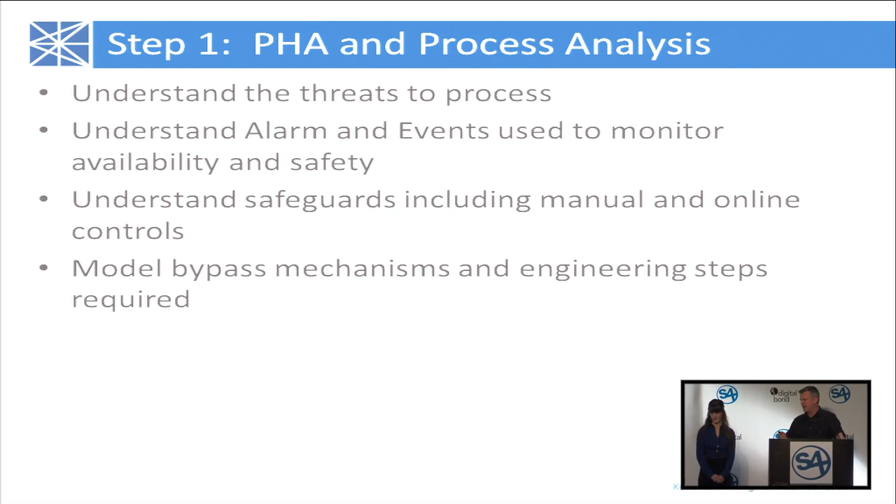So with that, we're going to talk about a distillation column, and it all begins with a P&ID. I got asked several times, are you guys going to show a P&ID? So here's your P&ID. However, if anybody's seen P&IDs, piping and instrument diagrams, they tend to be big and very complicated. Lily was kind enough to produce one that we can actually read on PowerPoint.

So this is what they look like. What I like to do is turn it over to Lily so she can run us through what the distillation column does. But really quickly before I do, why did we pick a distillation column? The reason is pretty simple. Number one, I don't really want to stand up in front of everybody and tell you what a very major mass casualty potential type scenario is.

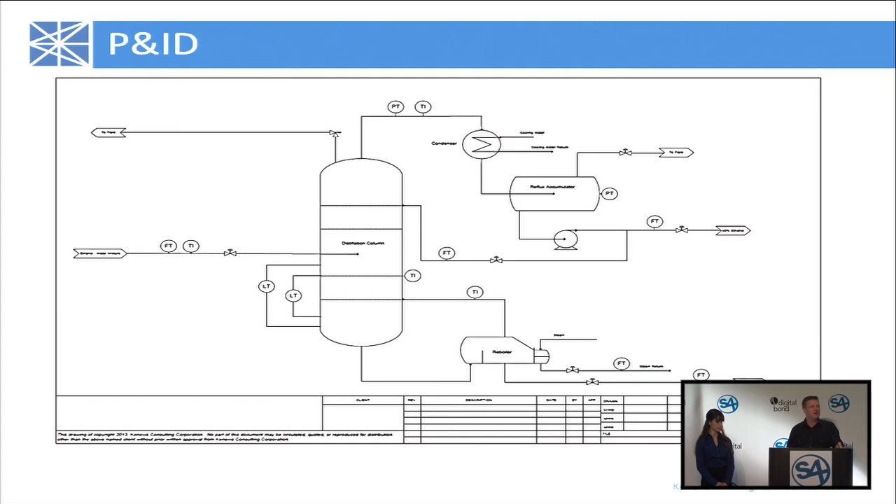Distillation columns, even though we might be processing various flammable chemicals at a high temperature and there may be some risk, tend to actually be fairly safe, because if they're well designed, they're going to have a number of controls in there that make the maximum damage type scenarios fairly unlikely. However, in any given process, the distillation column can represent as much as 40% or more of the energy used for an individual plant. So obviously, if we're able to impact one of these in various ways, we can cause extreme financial impact to an organization.

So I can already start to think of some various ways that people might want to try to cause inefficiencies in an operation like this. We're going to talk about that a little bit. So with that, this is our piping and instrument diagram, and we're going to turn this over. Lily is now going to walk us through a little bit about what a distillation column is and what it does.

The point of a distillation column is to separate your feed, which is a mixture, into its more pure components. The liquids are going to go down to the bottom of the tower, where they're sent to a reboiler and heated up using steam or hot oil. Some of them are returned to the tower as vapor, which will heat up the tower, and the rest will be sent off as bottoms, used for further processing or sent off to blending or products.

The vapors that go up the top of the tower are going to be sent to a condenser, which are cooled using cooling water, typically about the same temperature as the atmosphere. Then we accumulate those in the reflux accumulator until they're pumped into the reflux, which goes back into the tower, and the distillate, which goes off to further processing or products.

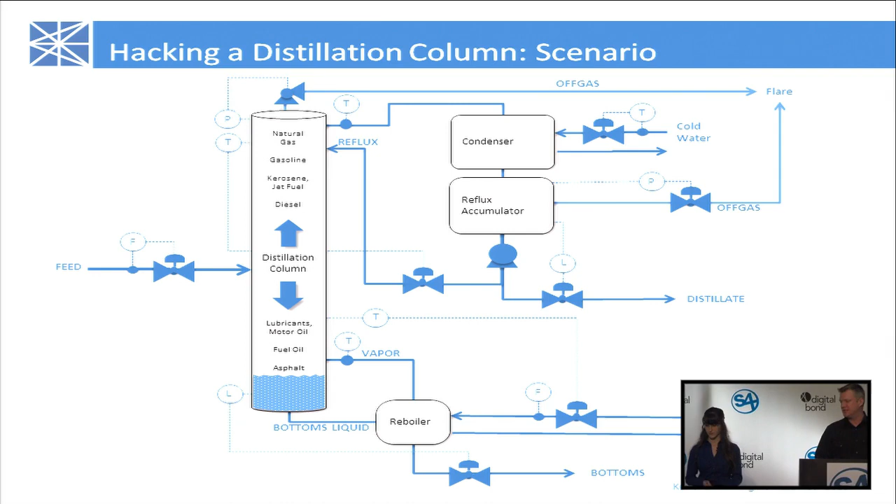Okay, I don't know about you guys, every time she's done this practice so far, she said reflux accumulator. I keep thinking she says flux capacitor, but anyway. So, okay.

So we're going to talk about an ethanol water mix. We thought we could talk about a benzene toluene mixture, but that's not as fun as talking about a vodka distillery. So we're going to be making 80 proof vodka, and after we've separated out the methanol and all the solids from our fermentation, we're left with about a 10% ethanol water mix.

That's sent to our distillation column, and because ethanol has a lower boiling point than water, it's going to be sent up the top of the column, and we're going to be sending some of it back as reflux, and the rest is going to be sent off as our product. If we wanted to make more than 80 proof vodka, say we also had a product that's 100 proof, we would increase our reflux to try to get a more pure product.

And then we're going to be sending water off as our bottoms.

The P&ID drawing you saw a moment ago, obviously that's going to be with the drawings that you're probably handed when you go to start an assessment. But if you go out and look at the HMI screens, most likely they're going to look an awful lot like this. They're going to show you what's going on in a various column. Inside that column are a number of trays that allow the separation of the various weight materials. And then obviously you're going to have your various valves and all those things shown there.

Operators are going to look at statuses, they're going to click on those valves, and that's how they're going to interact with the process for the most part. So we showed you what the P&ID would look like. Now we're showing you a little more about what the operators would see.

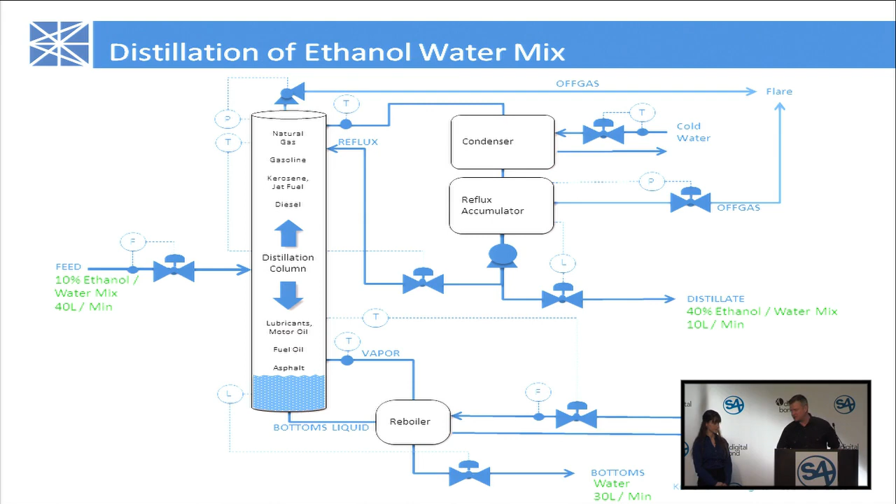So we're going to start moving into now, if we were called in to do a cybersecurity assessment, and this was Lily and I executing the project, me as a cybersecurity person, her as an engineer, these are the things we're going to look at. So we're going to start with looking at the hazards in the process.

Right away, Lily, the first thing you would think of is what happens if you increase the steam. Steam can be pretty dangerous because it's going to overtemperature your column by increasing the amount of vapor that you create from the reboiler, and that's going to increase the amount of vapor created inside of the tower. So you're going to have an increased flow over the top of the tower, and that may mean we're not able to cool all of that down into liquids in our condenser.

So we can have an increased amount of pressure in the reflux accumulator, and we might open up the control valve to release some of that to the flare, and that's burning off our product, and we can't sell it, so that's losing money right away.

So obviously, if you've ever been to an oil and gas refinery or a vodka distillery in this case, you see that big flare that's going out there all the time. That's product that's going out that's not going to be used. Now, the flare is obviously a normal part of the process, but if you're venting to flare, that's an expensive part of the operation.

So if we were to open this valve here on the bottom right that's highlighted in red, that would be how we would increase temperature into the reboiler. We increase the steam, correct?

Okay, so when I think about steam, obviously I think about pressure. So now, if we're increasing the steam in there, we're raising the pressure inside that column. Could that potentially result in an explosion in this column?

Well, typically, all of the distillation columns that you'll see will be fitted with a pressure relief valve that's shown up at the top. That's going to open up mechanically whenever anything happens that is overpressuring the column about a few pounds over the maximum allowable pressure.

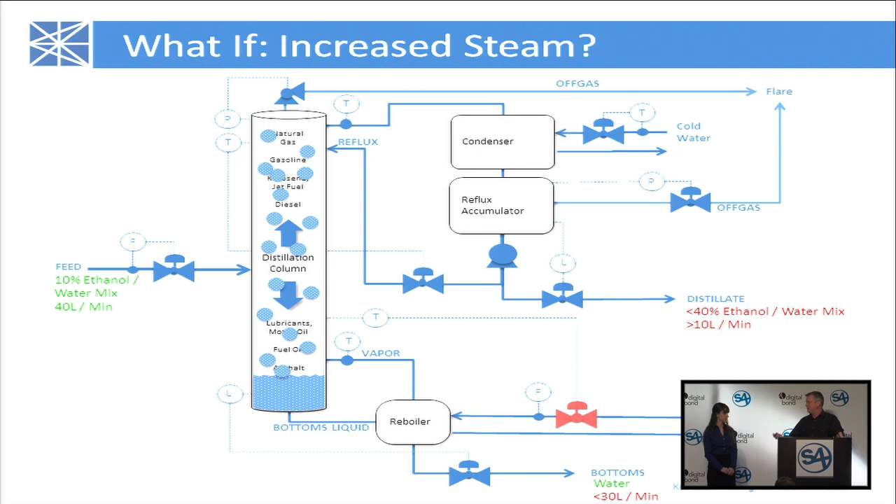We talked about how we could cause a premature failure inside the distillation column, which could result in extended downtime and increased costs for the operation. So obviously, we could cause a lot of financial impacts, but we're probably not going to create a very dangerous scenario as a result of this.

So like I said before, you're going to want to increase the amount of reflux you're using if you're wanting to get a more pure product. But say that we're not selling more than 80 proof vodka, then we're just making useless product, and we're going to have to spend operator time watering that down and making it something we're actually going to sell.

So that's just wasting our time and thus wasting our money.

Well, you're always going to be having a lab that's testing your product. It may only be every 6 or 12 hours, but you could fabricate the lab results and say you're not getting a pure enough product, say you're only getting 70 proof. Then your operator is going to say, hey, we need to increase our reflux so we're getting the correct amount of product.

So again, when we've done a lot of modeling, we've asked: are there alarm conditions in other areas of the plant that would have an operator go out and take the action we want them to take? Just because it's a manual valve or manual control does not mean an attacker wouldn't be able to somehow cause you to go out and do that manipulation.

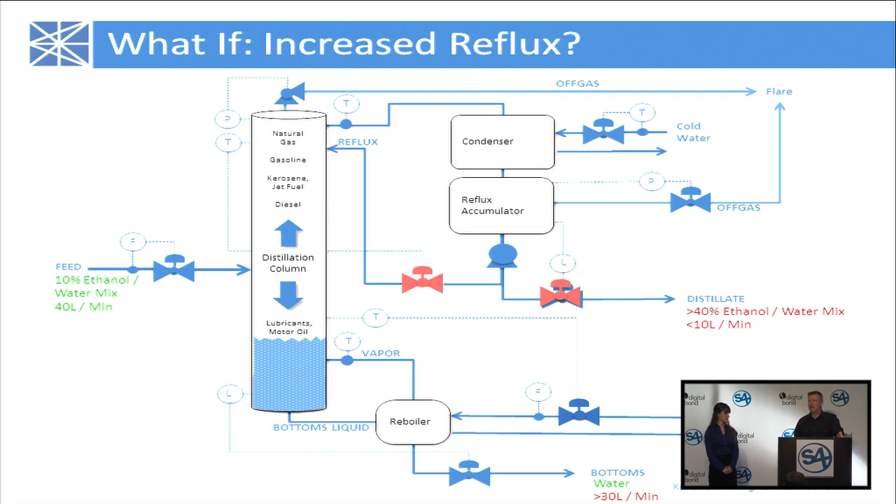Because what happens if I can actually send you that command and cause you to go open that up without any consideration? And they said, you're probably right. So after that, they instituted a procedure to call the scheduling office and verify the command before they executed it. Okay.

So anyway, continuing on to some other potential hazards. One of the biggest hazards I'd think of would be overfilling your tower. You don't always have your pressure relief valve fitted for the maximum pressure that you can create.

And one way of doing that is filling up your tower. So by closing off all the valves that are the outlets from the tower, you're going to overfill your tower quite quickly, and the operator may not have enough time to respond to that.

So if I flood my tower, what are some of the results? Earlier we talked about the trays inside the distillation tower. Those will get damaged if you flood your tower, and once they're damaged, you need to shut down your process and fix those. Contractor time is expensive, and they aren't working very efficiently, so it's going to be pretty costly if you have to shut down.

So the thing that comes to mind that we might want to watch out for—scenarios that some of us who have done assessments have heard—are things like labor negotiations. We've heard of people going in and making changes to the system so they can come back later and say, well, you really need us to come in and help you do this because you don't obviously understand it. This has not been the first time I've seen this.

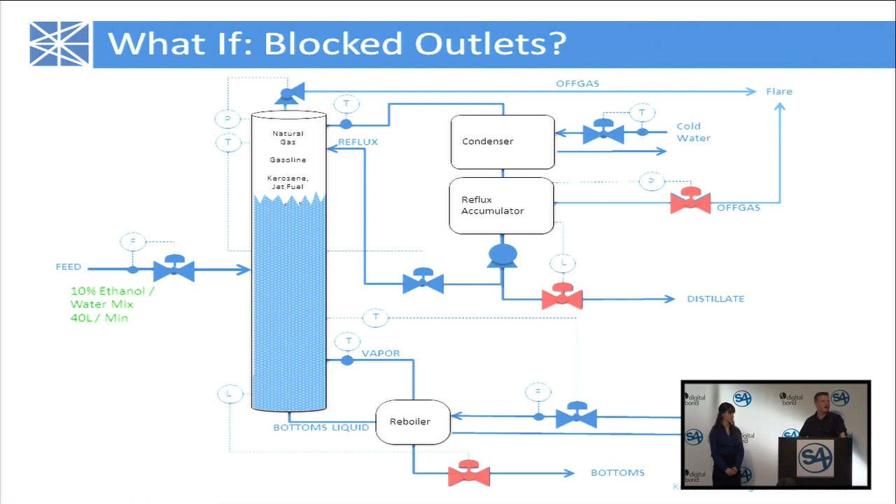This isn't even about the 30th or 40th time I've seen, in the last few years, scenarios similar to this, where people have gone in, caused these types of interruptions, and then tried to argue that they needed a job based upon that.

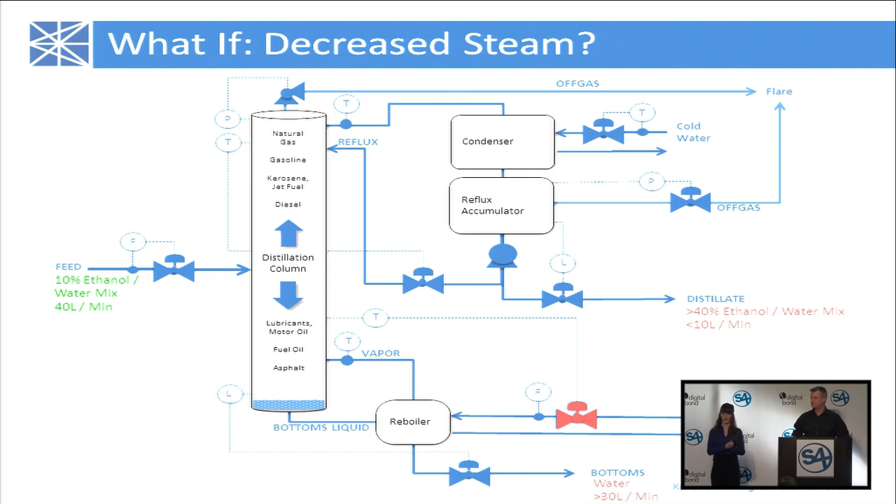A lot of times engineers are trying to decrease the amount of steam used in the refinery, because steam is so expensive, about 40% of it goes toward just distillation towers. So one way to mess up a distillation tower would be to decrease the amount of steam. By doing that, you're pretty much making your distillation column just a very expensive heat exchanger. And we can't know exactly what's going to happen inside your distillation tower without modeling it in HYSYS, since this tower may be different than your other tower or a crude tower, etc.

So you would do that by closing off your steam valve. If you're going to close off your steam valve, then obviously we potentially... what are some of the other impacts that might happen as a result of that?

If you are dropping the level in your tower, it's like if you've ever heated up your fry pan and then put water on it, it sprays a lot of water and gets heated up really fast. The same thing happens if you're decreasing the amount of steam. Your distillation tower may be heating up, but you don't have enough level in there to absorb the impact of putting in your fresh feed. That could damage the internals of your distillation tower. And if you're losing your level in the tower, you're going to have to redo your startup, which takes a lot of time.

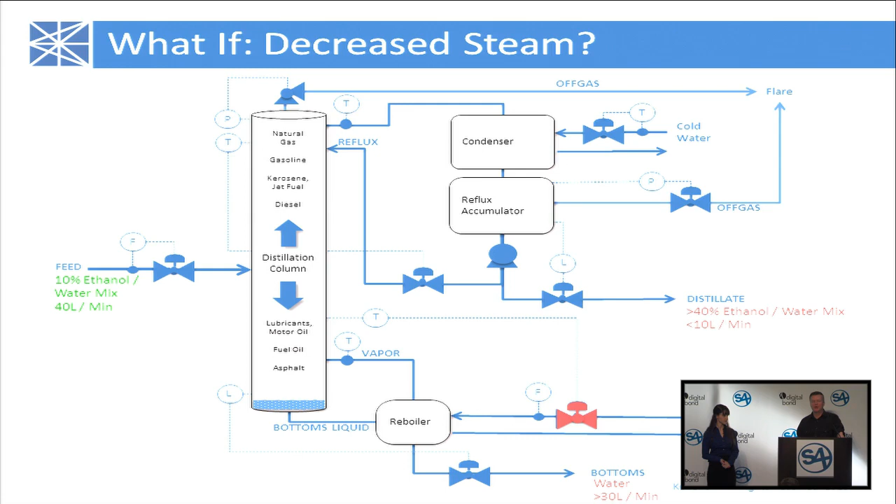Most of these end up being economic impacts and losses. But again, if 40% of the energy is being used in a facility, I can blow your whole quarter's profits with just a few minor impacts to something this significant.

So what we just went through was a fairly high-level example of the type of dialogue that happens during an assessment of this nature. This wasn't the level of detail we actually go through, but what was the process we essentially just went through with everybody?

Well, you want to make sure all of your equipment is properly sized. We say there's a maximum allowable working pressure of the distillation tower, but you also have to remember you have to go 1.5 times that amount before you can actually be leaking from the flanges. And you also want to make sure your pressure relief valves are alleviating enough pressure so you aren't reaching way above your maximum allowable working pressure.

And then you also have your operator rounds. Operators go around checking specific tags, checking the equipment, and they can hear if a pump is cavitating, it makes a really loud sound. There are several operators who actually even know what crude is supposed to taste like. They're old, and a lot of them have died from cancer, but they still exist out there.

And then you also have your manual bypasses. If a hacker goes in and closes off your control valve, you can open up the bypass around it, or if they open it up, you can close the block valves around it.

And then we have the PHAs, LOPAs, layer of protection analyses, where we associate a consequence — hey, we're going to kill 5 people from this, or we're only going to cause economic damage — and then how often we think this is going to happen. So you could have a $10,000 failure, but say, oh, we could have this happen 20 times a year.

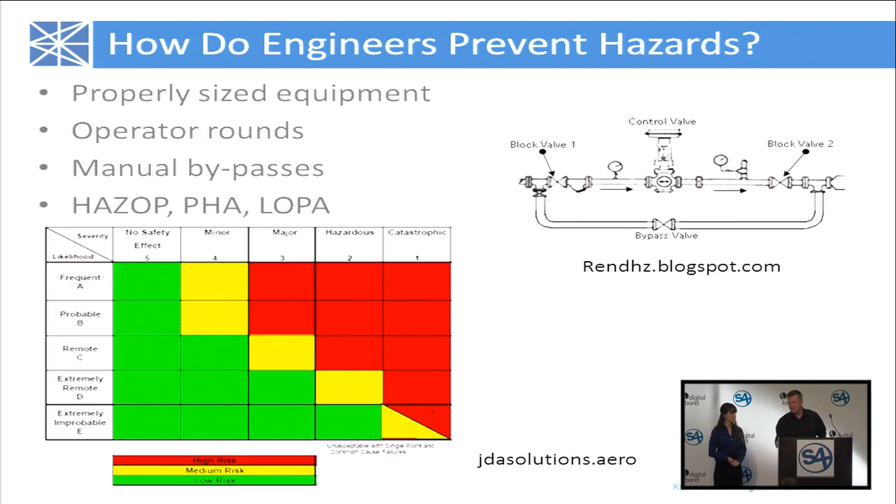Right, so how does this end up relating back to cybersecurity? What we just went through was the standard engineering practices that any engineer is going to do at any oil and gas refinery, or similar chemical facilities out there.

These things already exist, and this has been part of our contention for a number of years — we already know the maximum damage in the most critical scenarios, most likely, because there's not a plant I've walked into where I can't find the oldest, crustiest, grumpiest engineer, ask him how he would blow the plant up, and he's probably going to give me 20 plans in a few seconds, because he's thought about them all at different times over the years, right?

So the same thing, though. A lot of times, the maximum damage scenario is already known. The difference is, when we've modeled these from a PHA or HAZOP perspective, they've established the criticality of the impact, but the likelihood considerations are really only from entropic hardware faults, random hardware faults, things that happen in nature. They have not considered directed threats. So how we start to bring this back together is now we need to look at the cybersecurity steps.

We need to go through in order to conduct a cyber version of this PHA or a cyber version of a HAZOP. There are several terms out there, it's called CHAZOP, cyber, whatever, there's all kinds of stuff. But essentially I'd boil this down to very simple: we go through and look at the PHA data, we talk to the engineers, and then we start modeling what would somebody do at this step and this step and this step to cause the problem.

So cybersecurity likelihood considers the directed threats as well, and it can be intentional or unintentional. Obviously we've talked about that many times over the years. Countermeasures should include both engineered layers of protection, that's what we do the LOPA for, the layer of protection analysis, and cybersecurity controls into a comprehensive risk mitigation strategy.

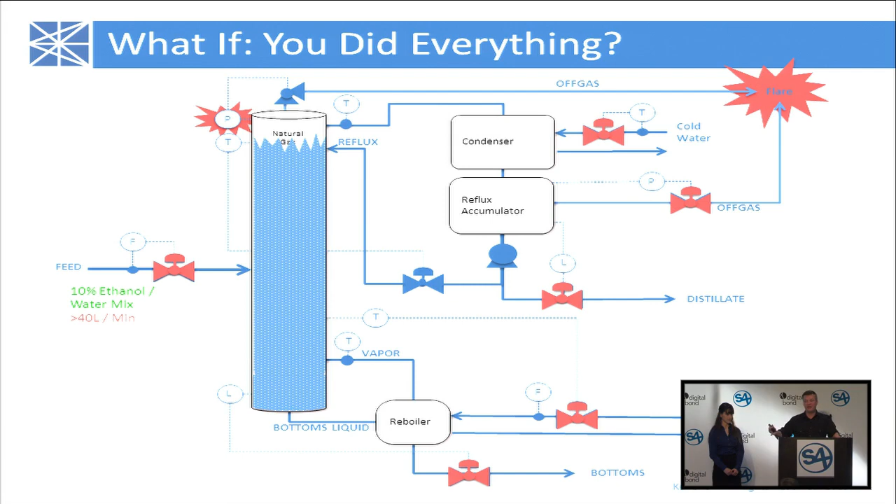Can you cause nuisance trips and shutdowns? Possibly. Can you cause impacts? Possibly. Are you going to be able to get to the level of attack we actually need to worry about for protection? Probably not.

We'll talk about that a little, at a high level, about how we actually gain that information. I look at things like the P&ID drawings, do social engineering, open source intelligence collection, and find sources of data with the pieces of information I need.

From doing these kinds of projects in the past, it usually takes me no more than a few hours to find P&ID drawings, process drawings, and HMI screens. Here are some of the places we look for them.

Going after the integrators, who most likely don't have the same level of protection as vendors or asset owners. If I'm going after a major oil and gas facility, connecting to them directly is the last thing I want to do until I'm ready for the attack, because I don't want them to detect it.

So I'll go after their third-party folks, the integrators, anything ancillary. I'll do everything I can to avoid touching those core systems until I absolutely have to, to decrease the likelihood of getting caught.

Finding these is not difficult. Another place we find this data is in bid specifications. Sign up as a vendor for some of these companies and they'll send out RFPs with diagrams, locations, GPS coordinates, and even sometimes IP addresses. There's a lot of good data in those bid specs for folks who know how to look.

Then obviously you do system mapping. This isn't as simple as launching Nmap scans out there. You have to use the actual protocols and communications themselves, and the discovery protocols that come from a lot of vendors.

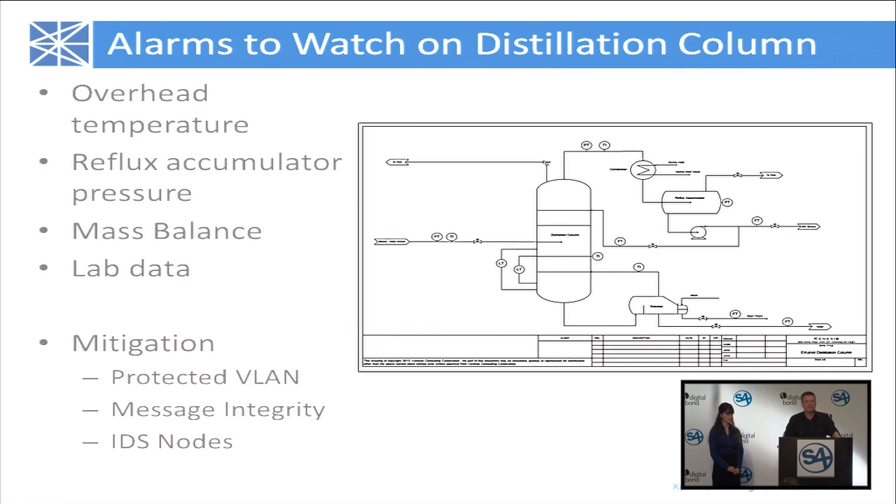So in other words, there's maybe some cases where we need a manual process to verify what's going on out there. These are all the types of processes you have to go through in order to identify the appropriate countermeasure for an individual scenario, okay? All right, so that's a little bit about network security monitoring.

And then let's talk about if all else fails, and we manage not to protect the process despite our best efforts, because as we know, hackers are pretty good at what they do. Things change, they learn new tricks, and sometimes stupid human tricks and all kinds of other things can happen. So we always want to prepare for the worst case scenario.

So we're doing it from a forensic standpoint. Let's say that we are called in. This would be an example, Lily and I have talked about this. You and I are the ones called in to respond to a particular incident. What are the things that you would look for? What are the things that I would look for? How do we combine those approaches into an overall solution, knowing, okay, where was it?

Colonel Mustard, lead pipe, in the study. How do we figure that out?

Don't forget the mobile devices. The bring your own device revolution, quote unquote, has brought us all kinds of things, like people that control their drives with their Nexus tablets through Bluetooth. So anyway, remember not all components are online or network accessible.

There's often physical relays. And the power utilities is the area you really want to focus on, because a lot of times there's physical registers that happen that are great sources of information that the engineers will go out and look at, but they never report back to the folks that may be investigating the incident. They're often physical relays, physical alarms, other sensors relevant to an investigation.